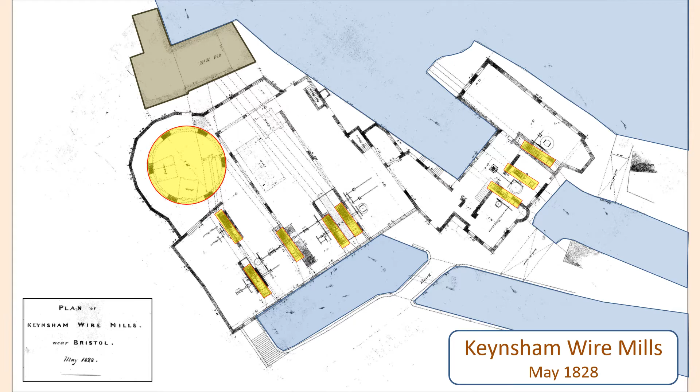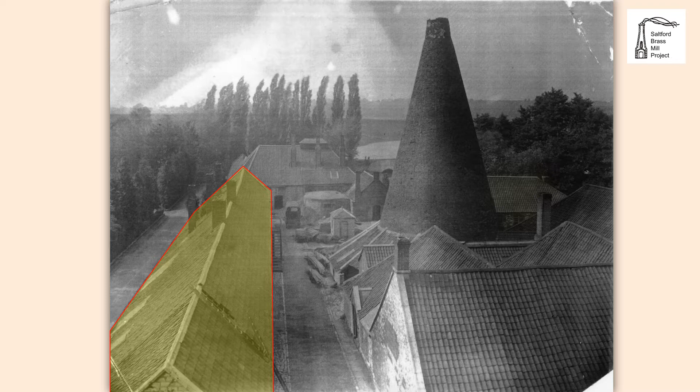And this is a view from the clock tower looking down the site. Again, its dominant feature is the large brick cone. The cone was demolished in the 1930s and the surrounding buildings in the late 1940s, but the row of buildings on the left remain, in part refurbished as the pub landlord's accommodation. And the old mill described earlier can be seen behind and to the right of the cone.

The manufacture of wire was a multi-stage process, the intermediary products being slabs, strips, strings and eventually wire of various thicknesses. The first step was to cast the brass into a long, narrow slab in an elongated mould. The slab was then rolled to produce a long coiled strip approximately 10 centimetres wide and 2 millimetres thick.

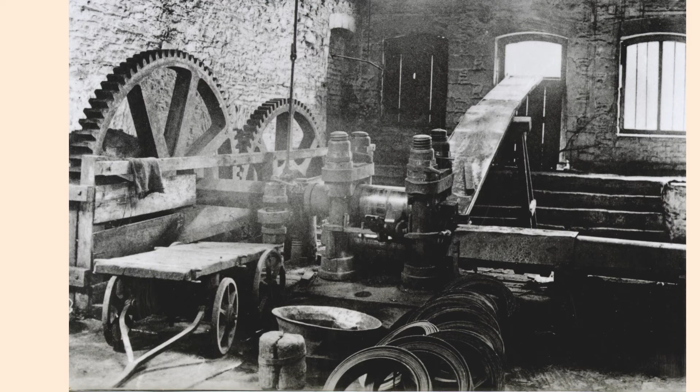Coiled strips were produced by passing the slabs through a rolling mill, a number of which can be seen stacked against the rolls in the centre right foreground. The upper and lower rolls were each driven by a separate water wheel, the large wheels in the background being a reversing gear to enable the rolls to contra-rotate. The 3 windows above the rolls looked out over the head race.

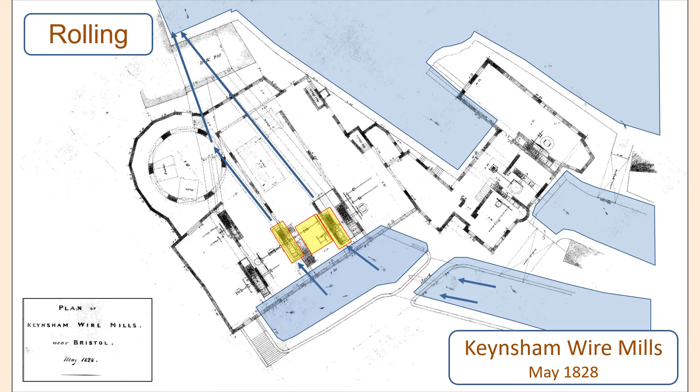And the rolling mill was located here, with the wheels either side driving the upper and lower rolls. The upper roll was driven by this water wheel via the reversing gear. The coiled strips were then taken to the slitting mill, where the strips were slit into multiple strings.

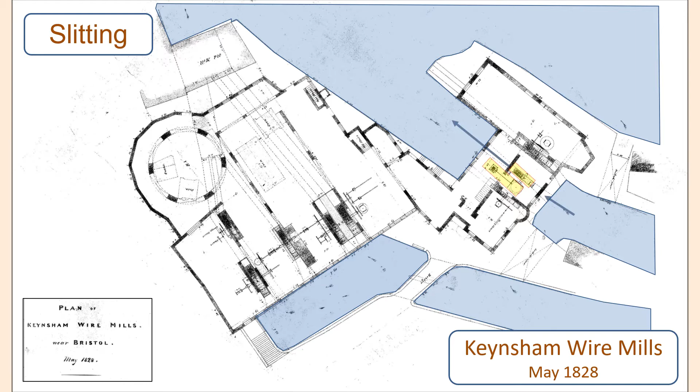Slitting was carried out in a separate workshop, which housed a slitting mill driven by a single water wheel. And the mill comprised 2 slitting rolls geared together to turn at synchronous speed.

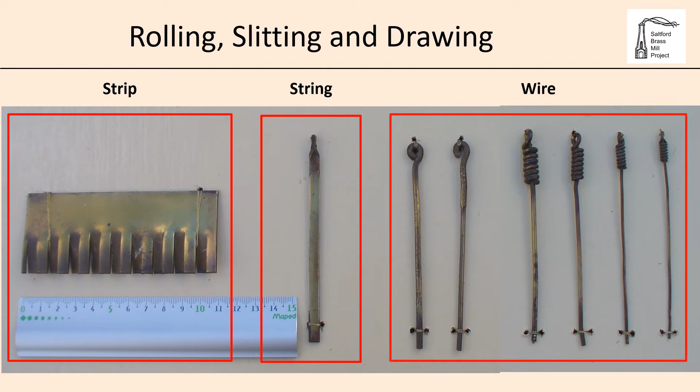The strings were then passed through a die called a whortle plate to produce thick wire, and the process repeated by drawing the wire through ever-decreasing smaller dies to produce the thickness of wire required. The wire was cold drawn, causing it to work harden, and requiring it to be periodically annealed to restore its ductility. The process was started by hand, but then transferred to a water-powered capstan to draw out the long coil of wire.

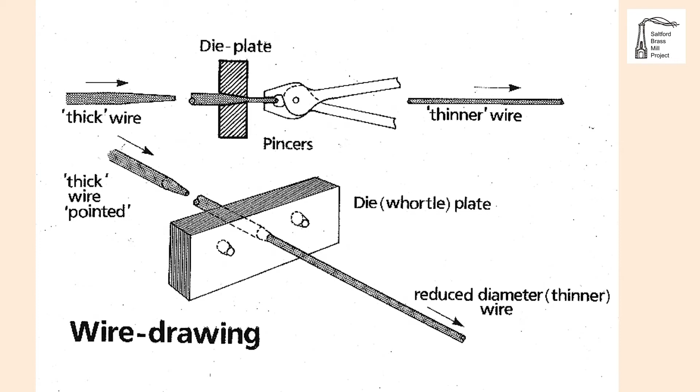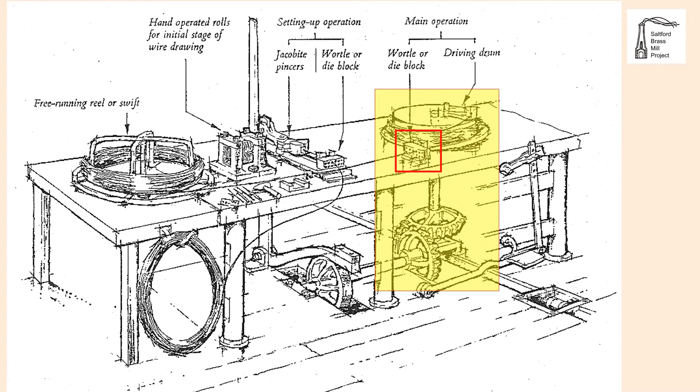The wire was drawn on a bench in a specially constructed workshop. Each bench consisted of a power-driven capstan to draw the wire, a die block called a whortle plate through which the wire was drawn, and a freewheeling reel called a swift to hold the feed material. The bench also had a hand-operated roll and pincers to enable a new coil of wire to be set up.

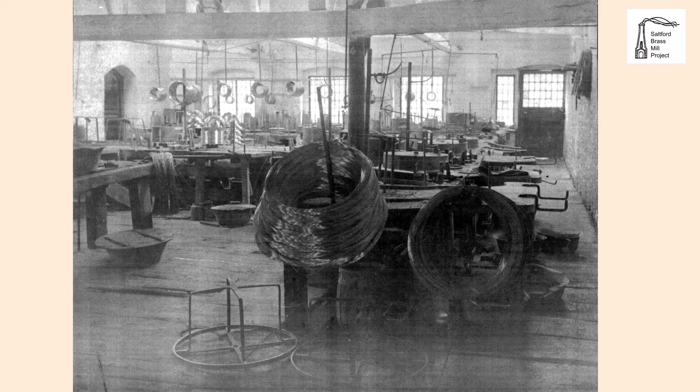And the wire drawing workshop was on the upper floor of the mill and contained multiple benches driven through drive shafts in the floor, turned by a water wheel on the lower level of the mill. Wire drawing was carried out in this area of the mill, with multiple benches being driven by a single water wheel.

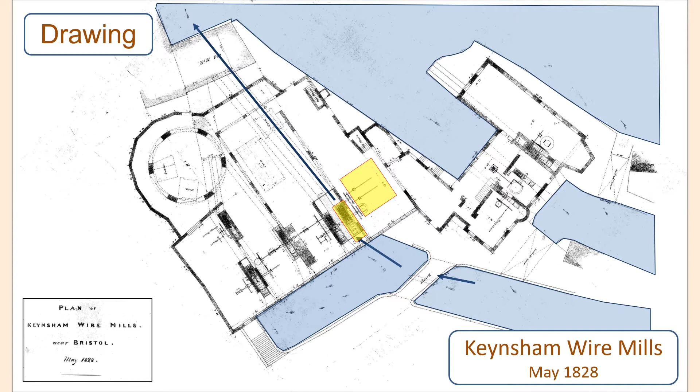We turn now to the Warmley Brass Company, established in 1746 by William Champion. William was the son of Nehemiah Champion, the technical director of the Bristol Brass Company and nephew of Richard Champion, a shareholder in the Bristol Company. Nehemiah had been responsible for many of the technical developments of the Bristol Company, taking out patents on annealing and improved brass melting in 1723.

William followed in his father's footsteps, touring Europe in the 1720s to observe the art of brass making, and returning to become a junior partner in the Bristol Company in 1730. William's major technical breakthrough was the smelting of zinc, for which he obtained a patent in 1738.

William broke away from the Bristol Company in 1746, founding a rival company, the Warmley Brass Company, for which he obtained finance from a number of investors, one of whom was Sampson Lloyd, an ironmaster from Birmingham who was later to found Lloyd's Bank.

William's aim was to create an integrated facility on one site that incorporated the full capacity of the Bristol Company of copper smelting, brass alloying, brass battery, wire drawing and annealing, with the additional capability of zinc smelting and a pin factory. The integrated facility was built on a large site in Warmley. But as demand grew, the company expanded, and an additional complex for smelting copper was built at Kingswood in 1761, described as the Kingswood Cupola, plus battery mills at Bitton and Kelston.

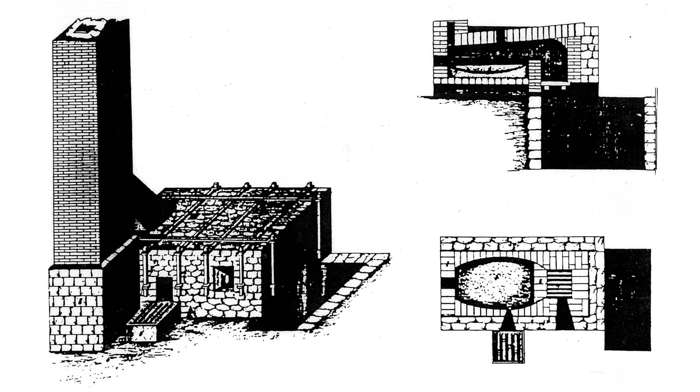Champion also replicated the brass alloying furnaces at Baptist Mills, with the construction of 12 brass furnaces at Warmley, rising to 15 furnaces in 1761. And the battery mills were also replicated, Angerstein observing 1 battery mill at Warmley in 1754, rising to 5 battery mills by 1761.

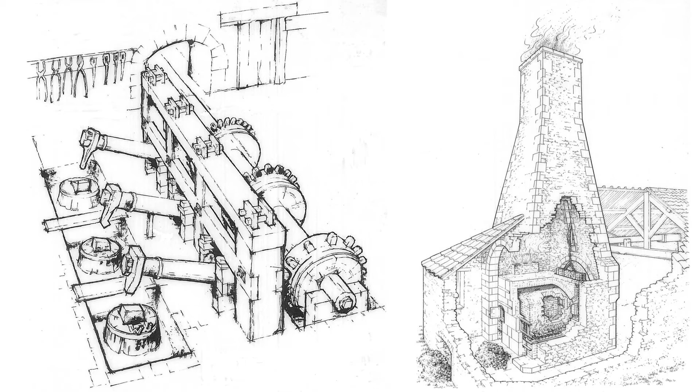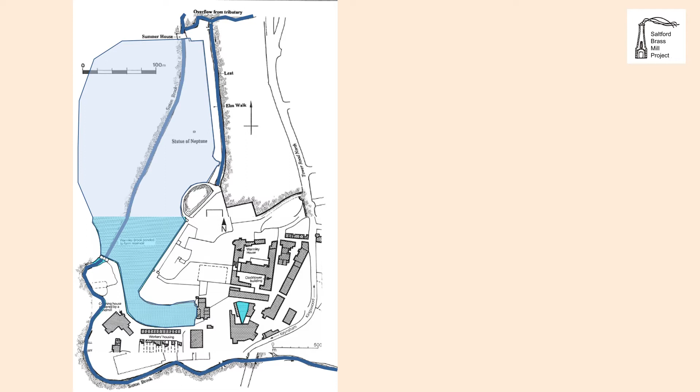Champion had ready access to coal at Warmley, but the site posed an obstacle of a supply of water to drive the battery and wire mills. The Siston Brook flowed through the site, but was too small to power the mills. The immediate solution was to dam the brook to create a reservoir of water of sufficient head to power the mills. But the mills could only be used intermittently, as once the head of water had been exhausted, it would take time for the reservoir to be refilled. Champion overcame the problem by installing a fire engine at the outfall of the mills to pump water back upstream into the reservoir.

The engines used a large amount of coal, but this was not an obstacle at Warmley, sited in the middle of the Kingswood coalfield. It should be noted that Boulton and Watt's engines did not appear until 1776, and Watt did not perfect his rotative mechanism until 1781. Hence, replenishment of water in a reservoir was the only practicable means of driving a mill using steam power available to Champion.

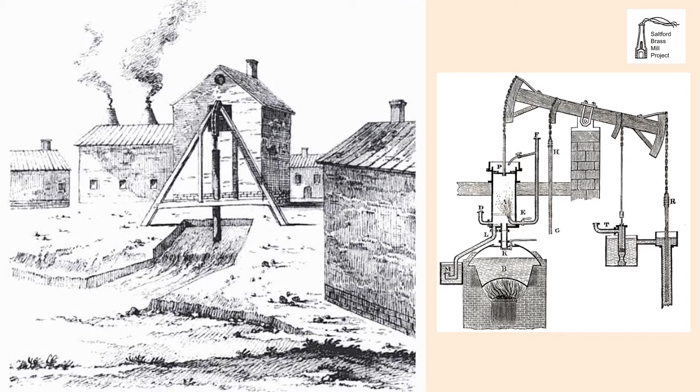This was Champion's pin factory. Pin manufacturers were major buyers of the wire produced by the Bristol Company, with Gloucester being a centre of pin manufacture. Pins were made by a combination of in-workers, paid piecework for manufacture in a factory, and out-workers, making pins in the home, workhouses, and sometimes prisons. Champion sought to increase his market share by erecting a pin factory on the same site as his wire mills, cutting out the pin manufacturers and placing both the drawing of wire and the manufacture of pins under his direct control.

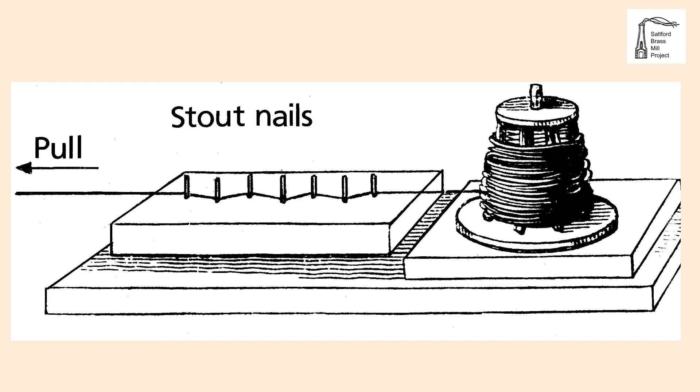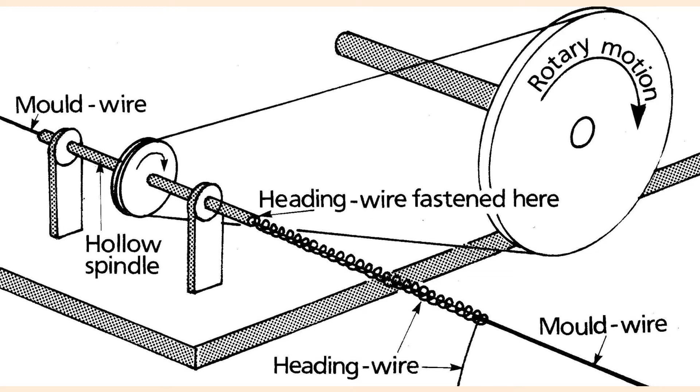The next step was to cut the straightened wire into the lengths desired for each pin. The pin heads were then made separately using a purpose-built coiler machine, powered by a person turning a large hand-cranked drive wheel. The pin heads were made by coiling soft heading wire onto a mould wire, and each head was then individually cut from the length of tightly coiled heading wire.

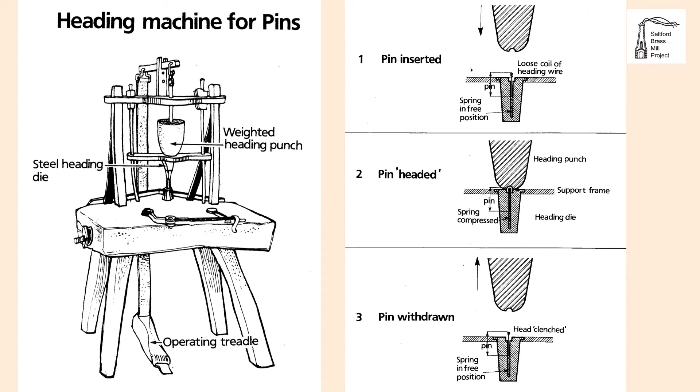The separate pin shafts and heads were lastly brought together using a pin heading machine. A shaft was placed in a hollow die and a coil of loose wire placed on the exposed shaft. The head was then struck with a weighted heading punch, which mechanically clenched the head to the shaft.

The economist Adam Smith used the division of labour in pin manufacturing as an example of industrialisation in the introduction to his groundbreaking work, The Wealth of Nations, published in 1776. Smith observed that there were about 18 distinct operations in the making of a pin, and with 10 men in a manufactory, they could make upwards of 48,000 pins in a day, whereas working individually, they could not have made 20 pins in a day.

As recorded on the reverse of the recently withdrawn £20 note, Smith summarised the analysis as the division of labour in pin manufacturing and the great increase in the quantity of work that results.

The next chapter in the story concerns the smelting of zinc, known as spelter, which was carried out at 3 sites: at Champion's Warmley Works, at Crew's Hole, and at James Emerson's works at Hanham.

Angerstein recorded in his journal a description of the various works at Crew's Hole, stating that here there is also a spelter furnace, made to the design invented by Mr. Champion, and put into operation at the Warmley Works as long ago as 15 to 18 years ago. The furnace is built just like a glass furnace and is fired in the same way with pit coal, as commonly done in this locality.

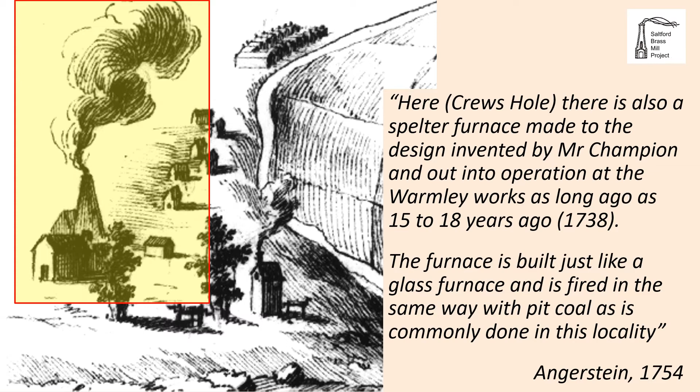Angerstein obviously gained entry into the spelter works, for his diary also includes a sketch of the inside of the furnace. Brass was originally made by heating copper in the presence of calamine, a process known as cementation. Calamine is a zinc ore, zinc carbonate, and whilst it was known that brass could be made by cementation, the role of zinc was not understood.

William Champion's breakthrough came with the realisation that residual traces of metallic zinc were plated out on the inside of the cementation furnaces. Champion therefore sought to capture the metallic zinc to enable the direct alloy of the metals to produce a better quality brass, a process known as speltering, and hence the metallic zinc was known as spelter.

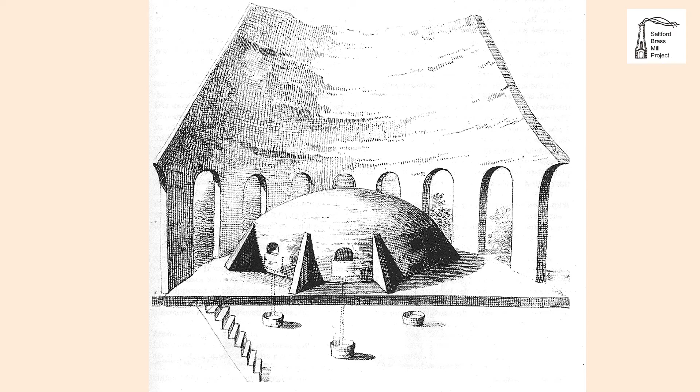William Champion was granted a patent in 1738 for his spelter furnace, the perfection of which had taken 6 years. Angerstein reported that he observed 5 such furnaces at Warmley, which had risen to 6 by 1761.

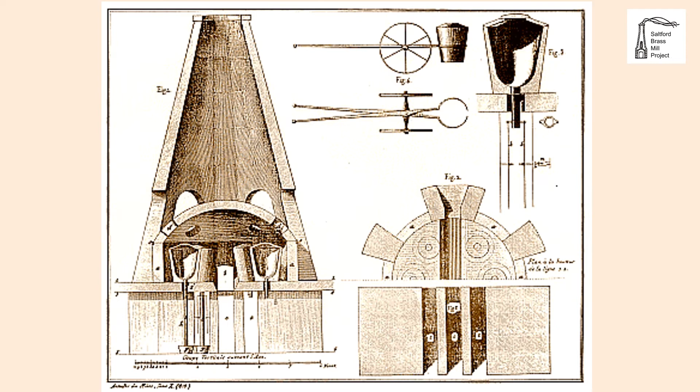The construction of the furnace was a closely guarded secret, hence few drawings have survived from the 1700s. The earliest detailed drawing we have of a spelter furnace dates from 1825, produced by Francois-Dominique Mosselman, a Belgian banker who acquired the then insolvent zinc mining and smelting company at Kelmis. Mosselman's predecessor, Jean-Jacques Dony, had visited Bristol clandestinely in 1804, where he observed the furnaces, which he then copied at Kelmis. The principle of operation was as follows.

A mixture of calamine and charcoal was packed into a special crucible, sealed at the top, but with an iron tube passing through the base of the crucible into a bath of water below. When the furnace was fired, the charcoal burnt, creating carbon dioxide, which created an inert atmosphere inside the crucible. Further heating caused metallic zinc to be released as a vapour, which was prevented from oxidising by the inert atmosphere. The vapour then passed down the pipe into a quench bath, where it crystallised as pellets of metallic zinc.

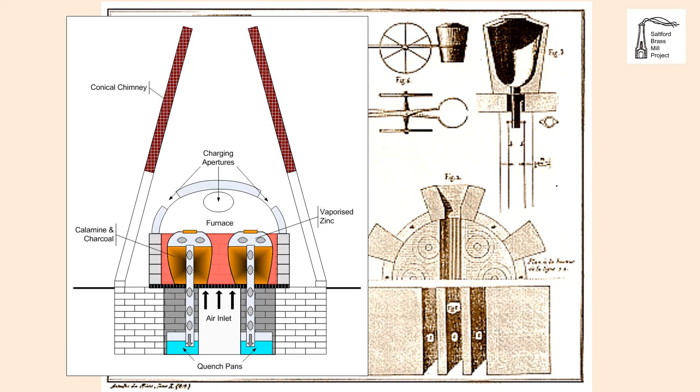The Warmley works were expanded through the 1760s, which demanded additional capital. In 1767, the company sought a charter of incorporation, enabling the raising of transferable shares, but which required parliamentary approval. With the new capital, the Warmley Company would have been twice the size of the Bristol Company, and concerns were raised that the company would develop into a monopoly.

Opposition to the move was successful, blocking the charter of incorporation. Without additional capital, collapse of the company was inevitable. To compound the situation, Champion tried to withdraw part of his capital without permission, as a result of which he was dismissed by his partners. In 1769, Champion was declared bankrupt, and the works offered for sale.

James Emerson had been the manager of Champion Spelter Works. In 1771, following Champion's bankruptcy, Emerson bought an estate and colliery in Hanham, previously owned by the Bristol Brass Company, and established a spelter works using furnaces of Champion's design. Emerson continued to develop the processes, obtaining a patent in 1788 for a new method of making brass with copper and spelter, his brass being described as one of the finest in the world and resembling gold.

However, by the early 19th century, Emerson was in financial difficulty and was declared bankrupt in 1803. The works were sold by auction in June of that year, described as including 2 calamine houses, 4 spelter furnaces, and 4 brass furnaces. The works were bought by Christopher Pope, who successfully operated the works for the next 29 years, but by 1832 Pope was also in financial difficulty and was declared bankrupt. The works were eventually sold by auction in 1838 and did not operate again.

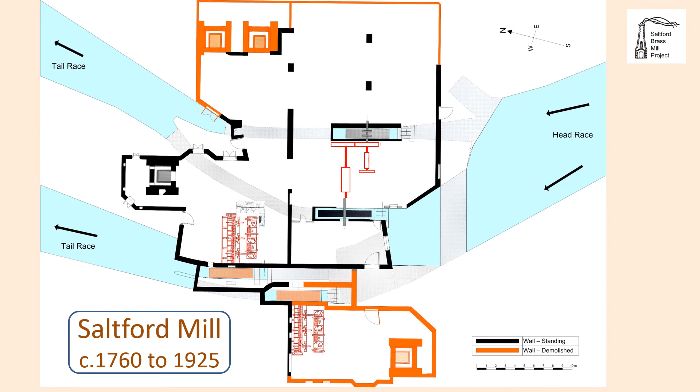One driver was the demand for sheet metal for sheathing ships. Merchant ships making the passage from Britain to West Africa and onwards to the Caribbean, and ships of the Royal Navy protecting trade in the Caribbean, were attacked by the Teredo Navalis shipworm, which riddled the ship's hull, making the vessel unseaworthy within a few seasons.

In 1761, the Royal Navy experimented with sheathing the frigate HMS Alarm with copper, which not only prevented the worm from boring into the hull, but also prevented the growth of barnacles and weed, which limited the ship's speed.

Bristol-built ships quickly followed suit, one such ship being the copper-bottomed Hester, built in 1768. The Hester was engaged in the triangular trade. One such voyage in 1788 from Bristol to Anamabo on the Gold Coast of Africa and onwards to Jamaica resulted in the transportation of 320 enslaved people.

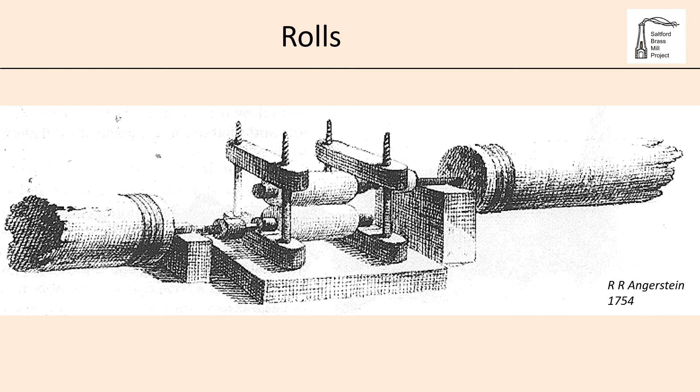The Bristol Brass Company had been operating rolls since the early 1700s as part of the wire production process, a set of narrow bed rolls being used to produce coils of brass strip from slabs of cast brass. Angerstein also recorded the use of narrow bed water-driven rolls in Birmingham for the production of sheet iron.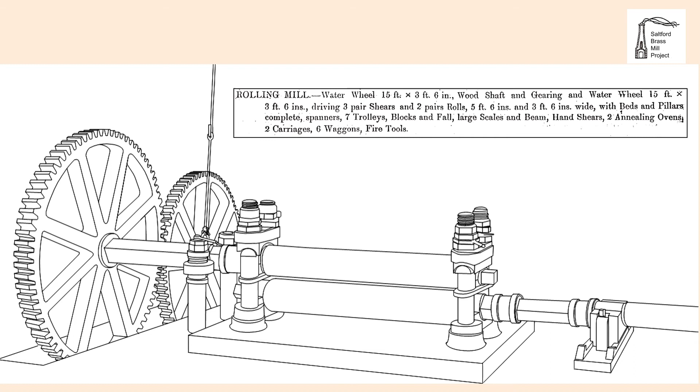The advance made at Saltford was to introduce wide bed rolls able to produce large sheets of metal by cold rolling. The inventory of 1859 recorded the mill containing two sets of rolls, a set of breaking-in rolls with a bed of 1.7 metres and a narrower set of finishing rolls with a bed of 1 metre. The configuration of the rolls was probably similar to the strip rolls at Keynsham.

We also have archaeological evidence at Saltford of the location of the water wheels, the bearing mounts, and the lifting eyes secured to a roof truss.

Based upon this evidence, a replica set of rolls has been built in the mill to explain their operation. The sheet metal would have been cold rolled, which, as with hollowware and wire, would have required periodic annealing, there being 2 annealing furnaces on the site.

Production peaked in the 1790s, but declined rapidly in the early 1800s as the export demand for brass collapsed. At the same time, Birmingham rose in ascendancy as the centre of the English brass industry, fuelled by the Industrial Revolution and the production of hinges, buckles, buttons, hooks and other household goods, collectively known as Birmingham toys. Indeed, in 1777, Edmund Burke, the statesman, philosopher and Member of Parliament, described Birmingham as the great toy shop of Europe. There was a consequent contraction in the copper, brass and spelter industry in the Avon Valley.